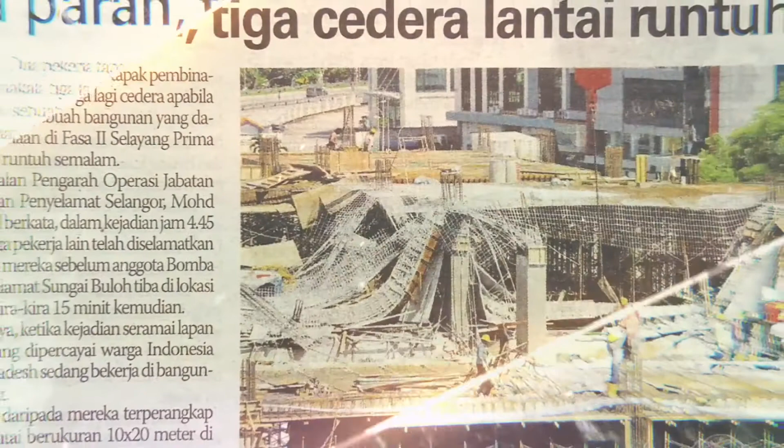Accidents may happen anytime, anywhere. Accidents may happen to you.

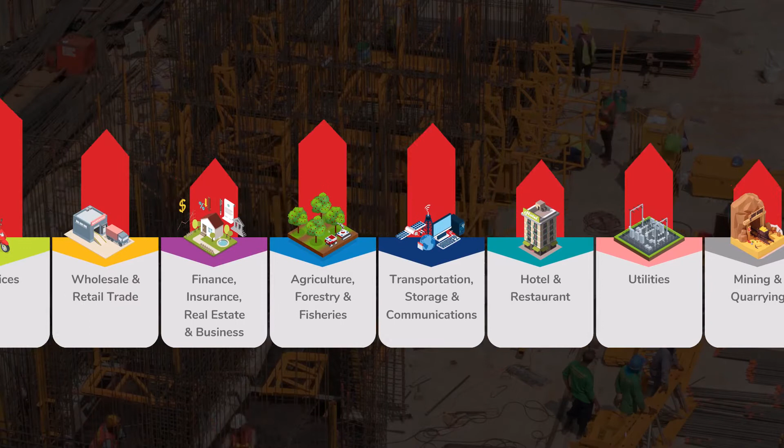Did you know that accidents happen throughout the year? The construction industry has the highest number of fatal accidents compared to others. That's why safety must be taken seriously by everyone who manages or works at construction sites. When it comes to health and safety, there should be no compromise.

And we should always strive to not only comply with the minimum standards imposed by rules and regulations, but to ensure that everyone can work productively, safely, and remain healthy.

This series of training videos comprises 6 parts and is based on the CIS 10 2020 Construction Industry Standard Book. This is a must-have book. You are encouraged to actively check and study the pages referred to in the videos. If you haven't got a copy of this book, pause this video and download the book for free from this link. If you've got the book ready, let's begin.

Whoa! Luckily, no one was hurt. I'd be flatter than roti canai if I was standing right there.

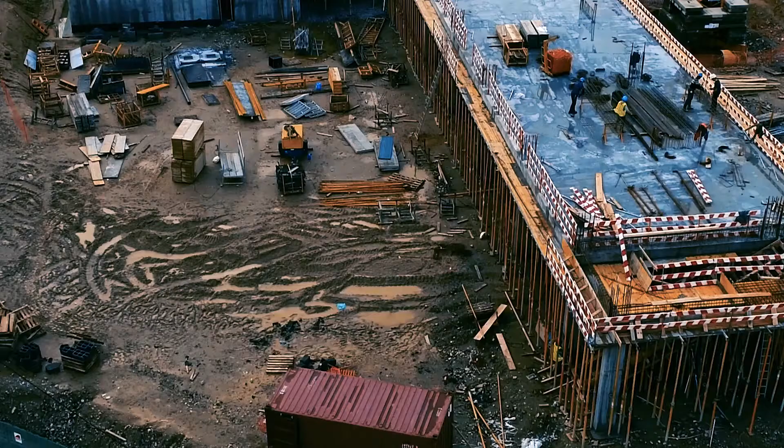Anyway, hi, I'm Farhan. We're here today to learn about Safety and Health Assessment System in Construction, or SHASSIC. SHASSIC is an independent method used to assess and evaluate the safety and health performance of a contractor in construction works or projects. It's important to note that the assessment should be carried out when the physical progress of the project is between 25% to 75%.

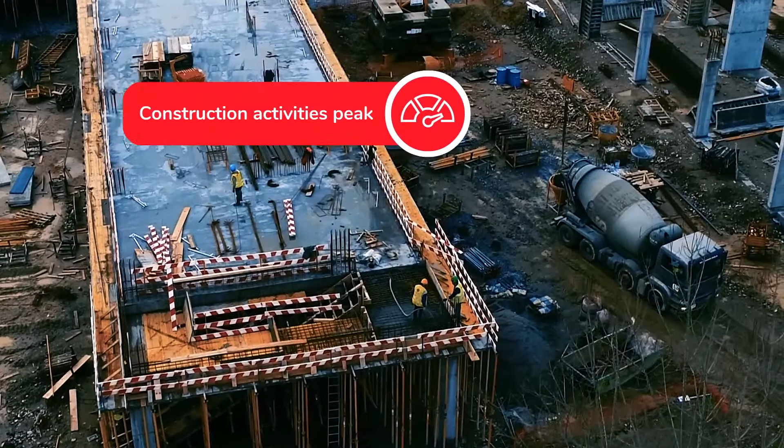This includes the construction planning stage and construction stage. Within this period, construction activities are usually at its peak. Workers are at full strength and there's great potential for accidents to happen.

Introduced in 2008 as Construction Industry Standard 10, the standard has been revised in 2018 and once more in 2020. This CIS 10 was developed and reviewed by CIDB with the assistance of stakeholders by forming a technical committee on safety and health assessment system in construction, which comprises representatives from various organizations such as government agencies, associations, practitioners, and academia.

Association of Consulting Engineers Malaysia, Construction Research Institute of Malaysia, Department of Occupational Safety and Health Malaysia, IOI Properties Group Berhad, Jabatan Kerja Raya, Master Builders Association Malaysia, Malaysian Occupational Safety and Health Practitioners, Malaysian Society for Occupational Safety and Health, Pertubuhan Arkitek Malaysia, Real Estate and Housing Developers Association, Toklan OSH Services, University of Malaya.

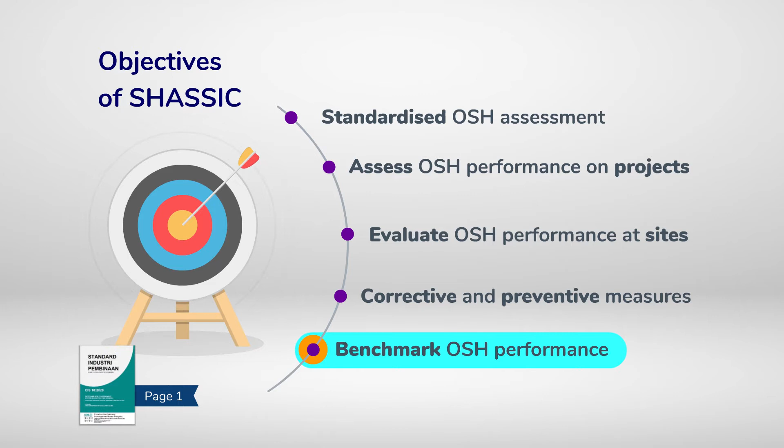As a feedback mechanism to improve and to take necessary corrective and preventive action on occupational safety and health performance and management at the site. And to benchmark the level of occupational safety and health performance of the Malaysian construction industry. Here's an easy way to remember the objectives. Rearrange these a bit, and we get SABEC. Repeat saying SABEC a few times, and remember what it stands for.

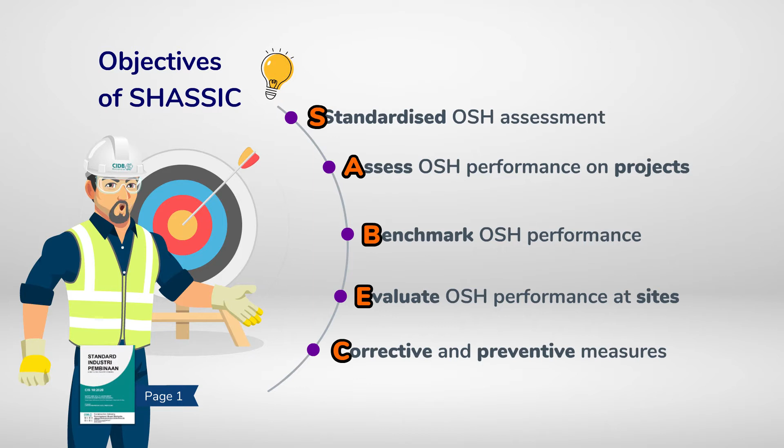A SHASSIC assessment covers the safety and health management and practices of the contractor in various aspects of construction work activities. The components assessed in SHASSIC include OSH policy, leadership and worker participation, planning, support and operation, OSH organization, hazard identification, risk assessment and control measures determination, OSH training and promotion, machinery and equipment management, materials management, emergency preparedness, incident and accident investigation and reporting, and records management and performance monitoring.

The components mentioned just now are under the scope of SHASSIC CIS 10 2020, OSH MS, Practices of Construction Planning Stage, CPS, and Construction Stage, CS, activities under Act 520. You'll see later how all those components have been incorporated into the checklists and questionnaires used in a SHASSIC assessment.

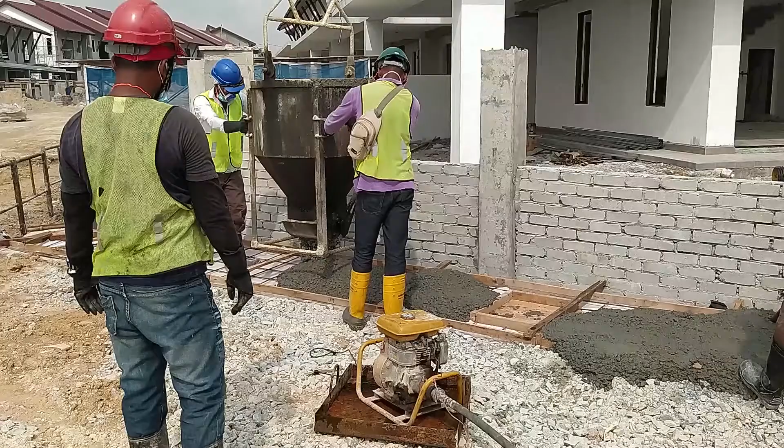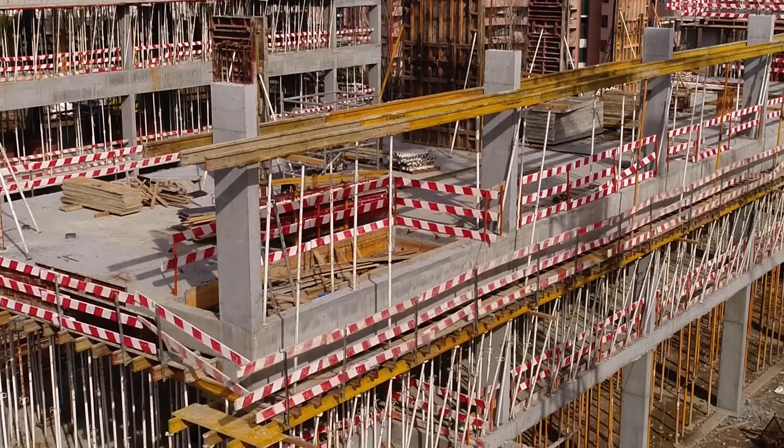The use of SHASSIC in a construction site is intended to complement the contractual requirement and specification of a project. It is not intended to be used independently to decide if the project site or parts of the project site are in accordance with the requirement of the relevant acts and regulations or OSH management system. Hence, it's important to know that it is still the responsibility of the contractor to ensure that safety and health of the construction site conform to legislation's requirement, approved standards, code of practice, guidelines, specifications, and contractual requirements.

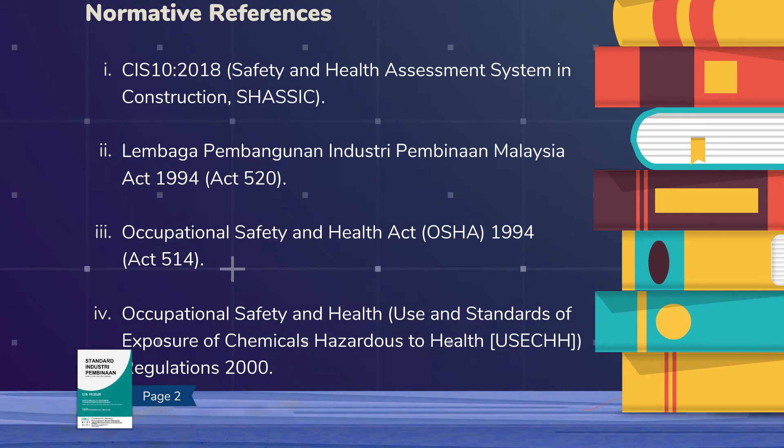In coming up with the construction industry standard for SHASSIC, CIDB has referred to various laws, legal requirements, and standards. It's going to be a long list, so keep your eyes open, okay? The assessment element was derived from Malaysia's legal requirements such as the CIDB Act 520, OSHA 1994 and its regulations, FMA 1967 and its regulations, Code of Practices, Standard, OSH management standards such as the ISOs, guidelines and other requirements.

Take note, guys, there's one question here appearing in the exam.

Now we're getting into the more practical parts, like how a SHASSIC assessment is actually carried out on site. A SHASSIC assessment comprises 3 components: document check, workplace inspection, and personnel interviews.

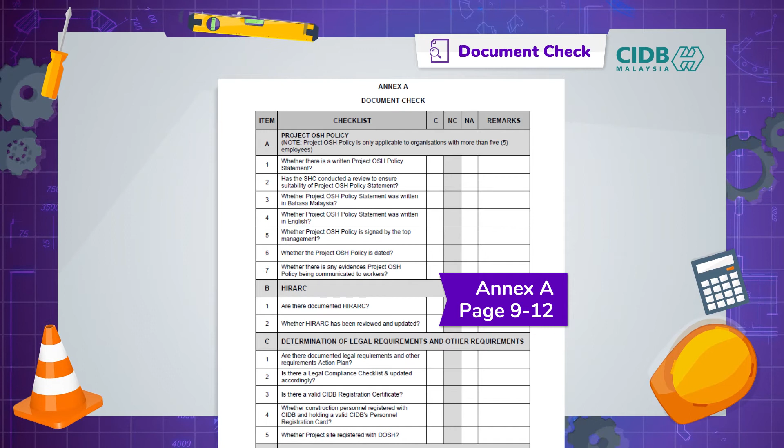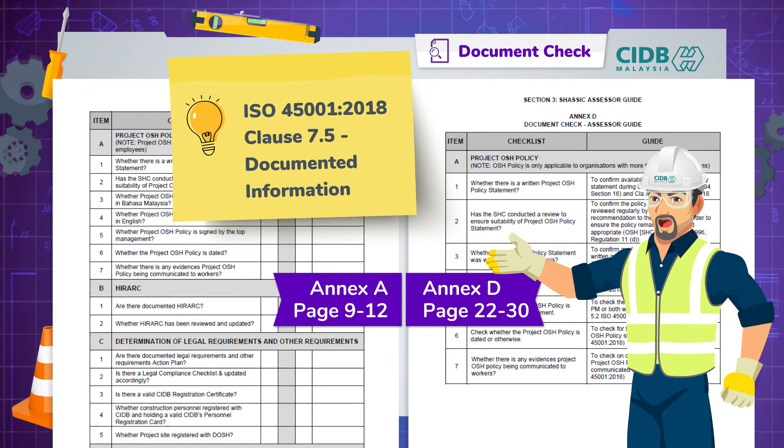When performing document check, we are required to inspect all OSH-related documents and records to determine if they comply with the safety and health checklist items provided in Annex A on pages 9 to 12. You should read these items together with the Assessor Guide in Annex D, found on pages 22 to 30. You can pause the video now and have a look at those pages. These items are information required under ISO 45001:2018, Clause 7.5, Documented Information.

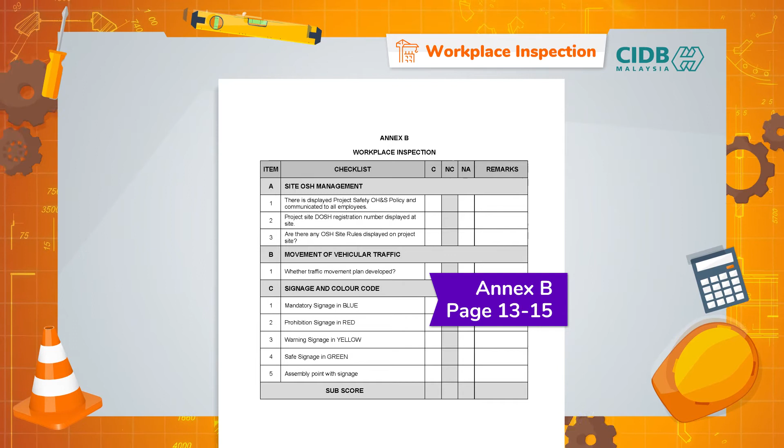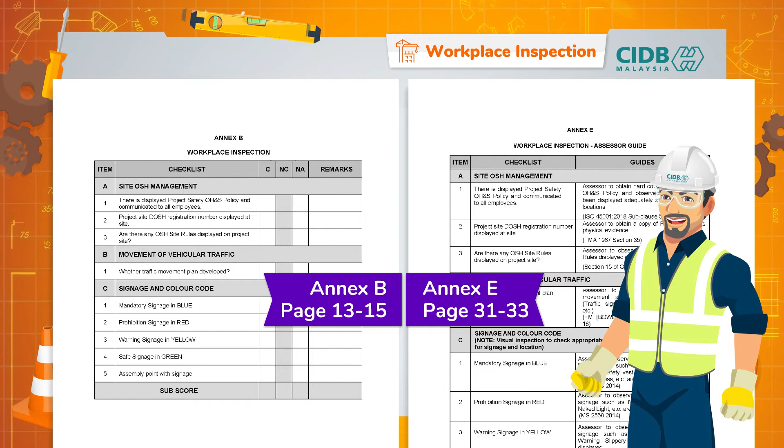Next, workplace inspection is conducted to assess OSH implementation at the site. This is where we need to observe things that are going on at the site and check OSH implementation according to our checklist. The checklist can be found in Annex B on pages 13 to 15. Read this checklist together with the Assessor Guide in Annex E, which can be found on pages 31 to 33. It's a good idea to pause this video now and have a good look at those pages before resuming.

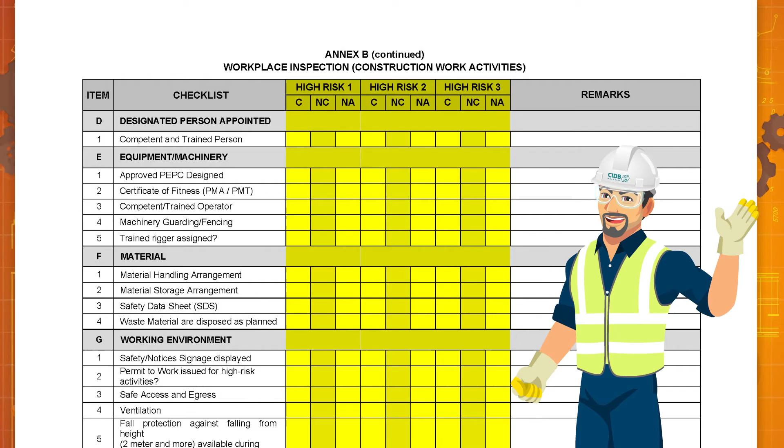As you can see, you need to perform workplace inspection on 3 high-risk areas. What are these high-risk areas? The high-risk areas should be identified according to the priority or hierarchy of high-risk areas. We are to select the top 3 high-risk areas applicable to a site from this list.

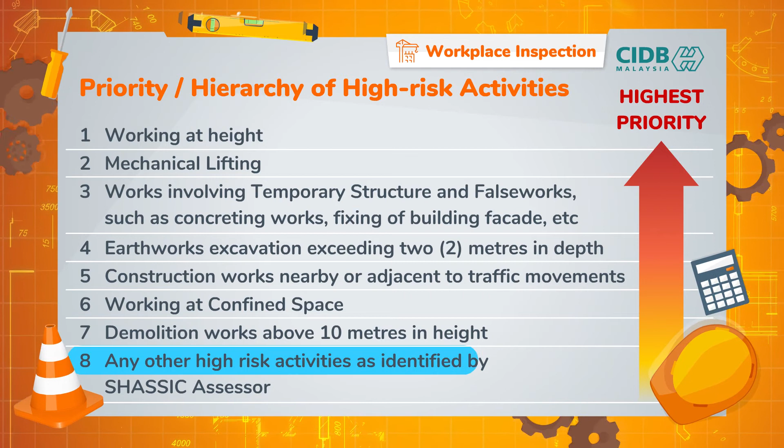Working at height has the highest priority, followed by mechanical lifting, works involving temporary structure and falseworks, such as concreting works, fixing of building facade and so on, earthworks excavation exceeding 2 meters in depth, construction works nearby or adjacent to traffic movements, working in a confined space, demolition works above 10 meters in height, and any other high-risk activities as identified by the SHASSIC assessor.

Last but not least, personnel interviews. To conduct the interviews, we randomly select personnel from these 3 categories and interview them one by one. We randomly select one managerial personnel from category A, which consists of project director, project manager, construction manager, site agent, project engineer, quantity surveyor. Randomly select 3 supervisory personnel from category B, which includes site supervisor, designated person (DP), OSH

committee members, and/or a combination of both, safety and health officer (SHO), site safety supervisor (SSS), and 9 working personnel from category C, preferably 3 from each of the 3 high-risk construction work activities selected for workplace inspection.

Interviews are conducted using the questionnaire in Annex C, which can be found on pages 16 to 21. Read this together with the Assessor Guide in Annex F on pages 34 to 37. We'll learn about each item in the questionnaire later in this course. In a nutshell, that's what we do when conducting a SHASSIC assessment on site. We'll learn about each of these in detail in part 3 to 5 of this series of videos.

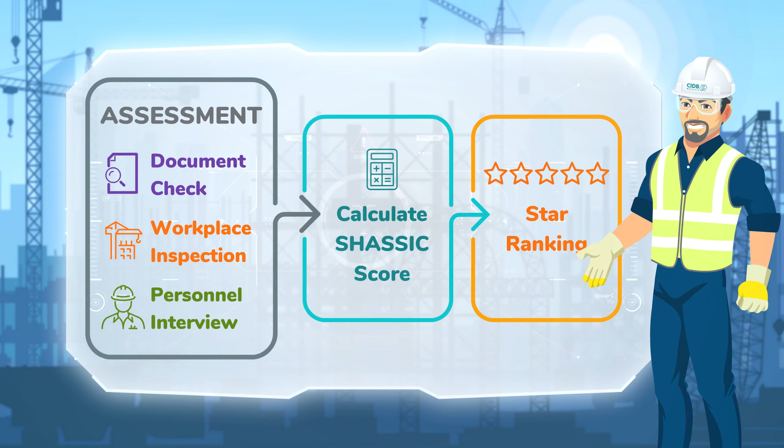After conducting the on-site assessment, the SHASSIC score is calculated based on the assigned weightage and formula. A star rank is then awarded based on the score. Let's see how the scoring and star ranking are obtained. Here's the weightage assigned to each component. Document check contributes 20% to the overall score. 60% comes from workplace inspection, and the balance 20% comes from personnel interviews.

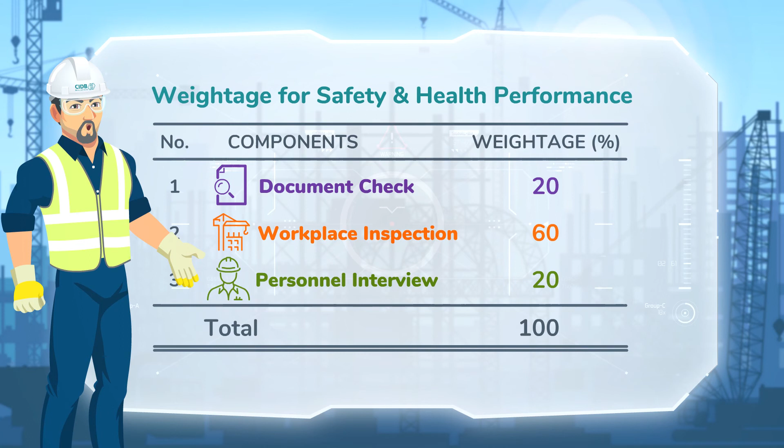These weights are incorporated in the formula that we use in calculating the scores. We'll learn the formula to calculate the scores in part 3, 4, and 5 of this series of videos, so you don't have to worry about performing the actual calculations for the time being. For now, just remember that the overall SHASSIC score is obtained after we sum up the scores for each component, and that the maximum score is 100%. Finally, refer to the star ranking table to find the number of stars to be awarded for the SHASSIC score obtained.

For example, if a site obtains a score of 85%, the site gets 4 stars, which means that the site has been doing a very good job, but not excellent yet. There's room for improvement in the future. But if a site gets a score of 49% and below, sadly, the site has failed to meet the minimum OSH requirements. For those that pass, a certificate and a report will be issued.